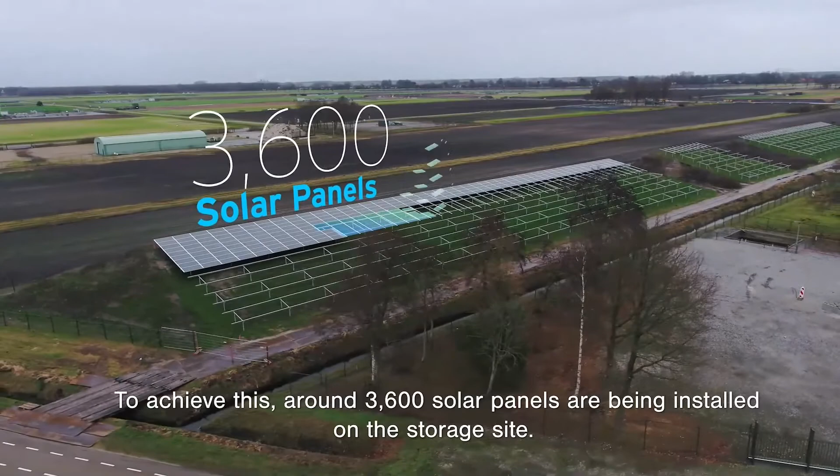Gasunie and its subsidiary Energy Stock have built the first 1 megawatt green hydrogen installation in the Netherlands, near its underground gas storage in the province of Groningen. The unit uses green power to separate water into green hydrogen and oxygen in a process called electrolysis. 1 megawatt hour of green power is converted into 17 kilograms of green hydrogen per hour. To achieve this, around 3,600 solar panels are being installed on the storage site. In addition, the green hydrogen installation is also connected to TenneT's high-voltage electricity grid, through which green power is delivered.

Three containers are installed on site. The first contains equipment to convert the green power to the required voltage for the electrolyzer. The second contains the electrolyzer, in which water is separated into hydrogen and oxygen. The third contains the compressor, which brings the hydrogen to the correct pressure, varying from 200 to 300 bar. The hydrogen is stored in a trailer capable of transporting 800 kilograms of hydrogen to customers in the mobility sector or industry.

In the Netherlands and other countries, filling stations are being developed where cars, buses, and other heavy-duty vehicles can fill up with hydrogen, for example at Green Planet's filling station in Pesse. Filling up takes around 3 minutes, the same as for petrol and diesel cars. A hydrogen car can run for approximately 500 kilometers on a 5-kilogram tank of hydrogen.

Green hydrogen can be used as a renewable resource or fuel by industry. Currently, industry already uses large quantities of hydrogen as a resource. Hydrogen is a sustainable energy carrier that is desperately needed to realize the targets set out by the draft climate agreement. It is CO2-free energy that can bring balance to our future energy management. The aim of the HyStock project is to boost the green hydrogen market and provide the Netherlands with proof that green hydrogen works. It is an important step towards the large-scale use of green hydrogen in the Dutch energy supply.

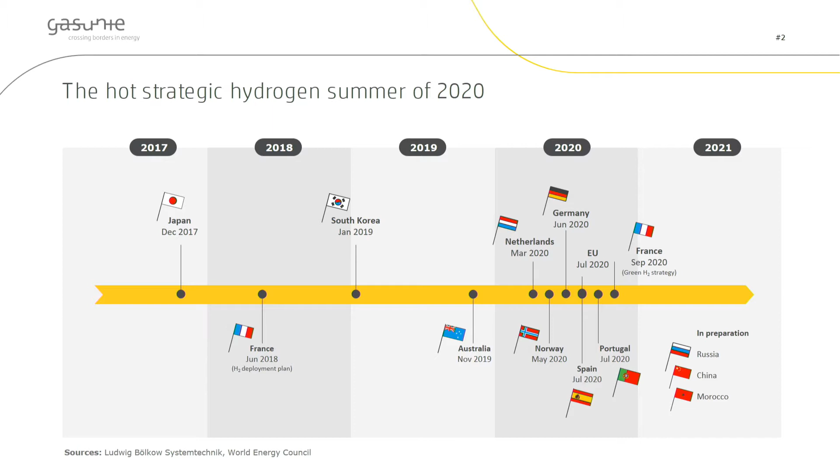To start off with the first timeline, which represents the hot strategic summer in 2020, where all the large countries in Europe launched their hydrogen strategy. Together with launching the strategy, lots of money were put towards building up the hydrogen economy. At the start of the project, back in 2016, you see an empty timeline at that moment. There was not much discussion about hydrogen. It was not seen as the key element. I think at that time electricity was seen as the answer - if we electrify everything, we're done. But that has changed in a couple of years' time, and I think that's also due to the importance of projects like TSO 2020 and what it has delivered.

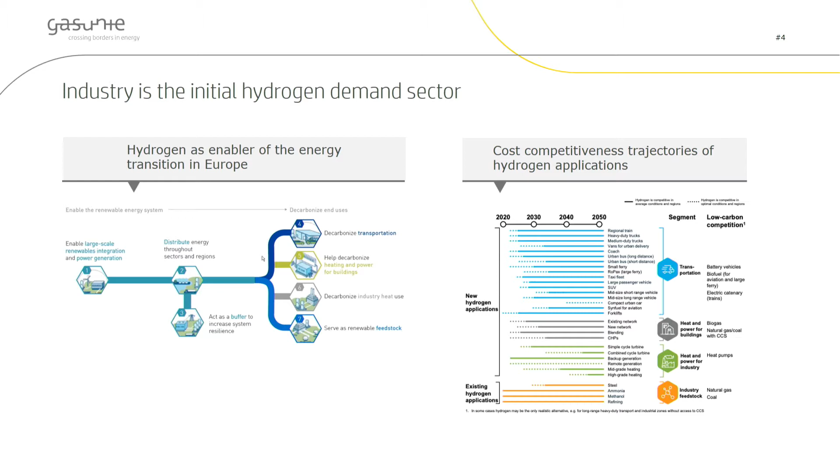If you look at the right side of the picture, the Council showed the different end users, which can be in industry, for heating processes, obviously for feedstock - which is now the common use of hydrogen - but also in mobility, built environment, and electricity production. Because in the future, when we have a lot of renewable energy sources, we need to deal with the intermittent character of that. So we also need power plants, in one way or another, that can provide dispatchable power at the time the wind doesn't blow and the sun doesn't shine.

This picture made by the Hydrogen Council shows that by 2050, all of it can be competitive. That's a key driver in many developments at this moment in time - developing it to the level where the commodities eventually become cost competitive, and where you can make the appropriate choice of energy carrier for the process you have.

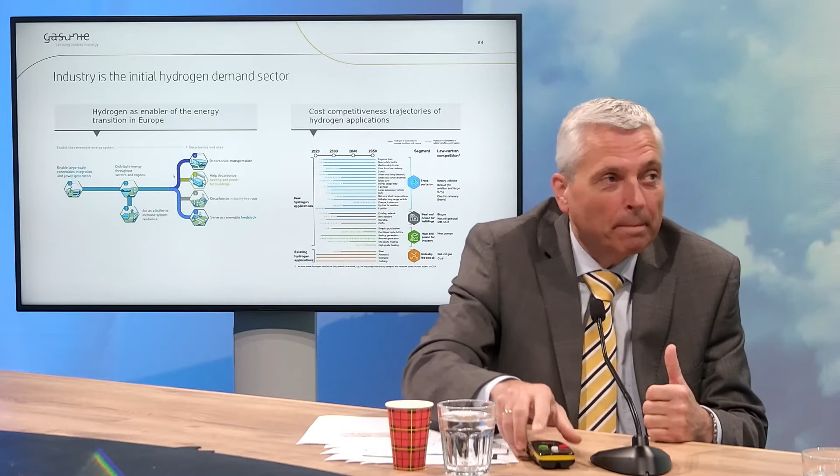And then it's all about connection. If you have your projects - as already shown in the movie you've just seen - you have a location where production takes place, and a location where end use is located, in this case a refueling station, so the actual end use is by the cars driving by. But transport needs to happen in between. If you don't have transport and storage, in this case tube trailers, you cannot make the value chain work. And if transport and storage means are available, that gives opportunities to both production sites and user sites to further develop.

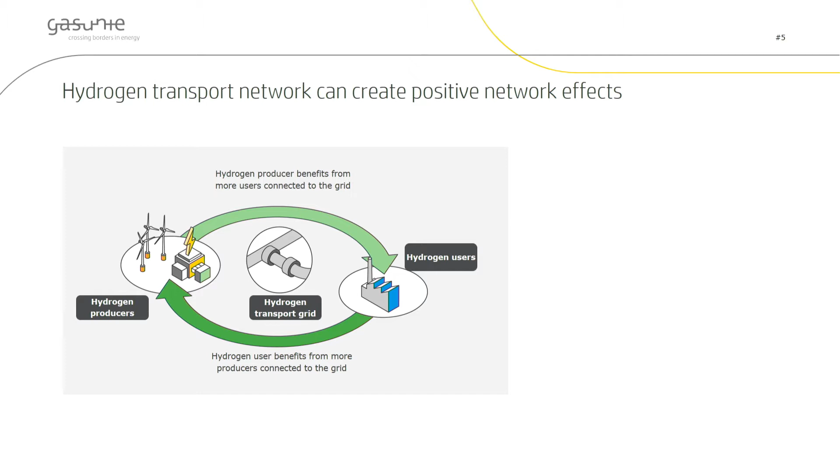So how do we get this whole chain off the ground? Because it's not just a part of the value chain that we need to build up, but the full value chain. We need to make sure we build infrastructure in between - it can of course be pipelines and underground storage, but it can also be surface transport and storage, like for instance tube trailers.

I always call the issue of the energy transition an ostrich and egg story, because I believe it's larger than the chicken and egg story. It's very complex, not only because of the value chain that needs to be built up, but also in the complex situation of the energy transition, where we need to go from use of fossil fuels to use of renewable energy carriers.

What you need to accomplish the energy transition is, first of all, scaling up. All technologies we need basically already exist, only not at the proper scale where we need to use them. So we need pilots, like TSO2020 has shown, demonstration plants and smaller projects that will grow to larger projects to, in the end, not only demonstrate that it can work and build up the market and volumes, but also give opportunity to learn from the experiences.

We also need a lot of renewable energy sources. Discussion on hydrogen for a long time has been predominantly about electrolysis and end use. But we need not to forget that a lot of renewable energy sources are needed, so plans for that need to be made as well.

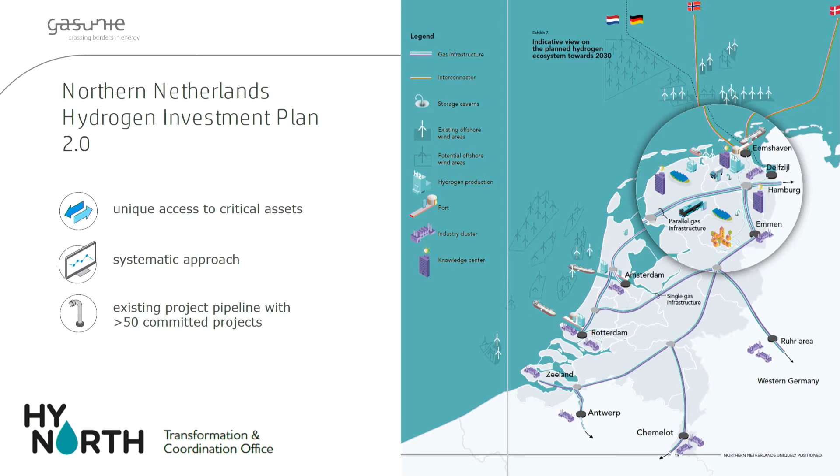And then I come to HyNorth. In the northern part of the Netherlands, 3 provinces - Groningen, Drenthe and Friesland - more than 50 companies have, together with the government and knowledge institutions, put together the Northern Netherlands investment agenda for hydrogen. It's a 9 billion plan, which includes a large project like North H2, aiming at 10 plus gigawatts in 2040, meaning 4 gigawatts by 2030 and 500 megawatts by 2025. But it's also about building up the value chain in the region, combining projects in mobility, industry, heating, feedstock, together with building up the knowledge we already have here. It's the triple helix - government, local government, together with industry and knowledge institutions - to build up a larger hydrogen valley, a larger ecosystem, which can be copied in different parts of Europe and then interconnected to build up the hydrogen economy. We have a very good location for it due to the seaside, wind power projects, and industries. That's what we can do in a systematic approach.

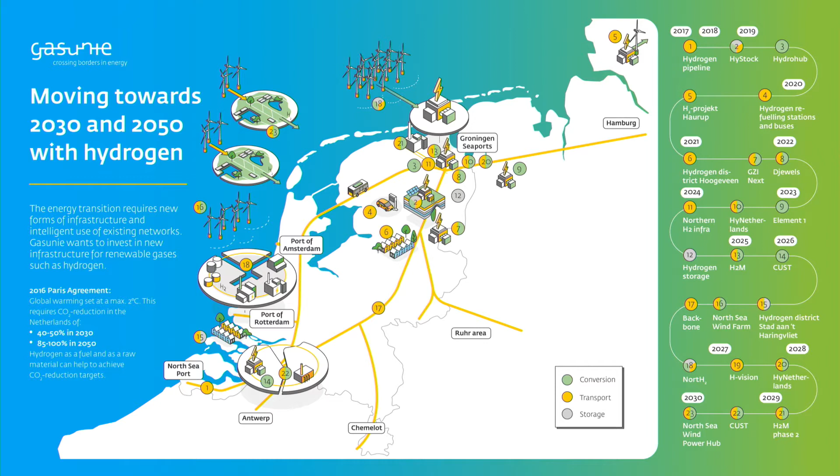And then I will close with the last picture that you already saw shortly in the introduction. This is the project plan that has evolved over the past years for Gasunie, starting with TSO2020 in the northern part of the Netherlands. Lots of projects have been started and initiated in different parts of the Netherlands, including the proposal of the backbone for hydrogen, connecting the 5 industrial clusters in the Netherlands with each other and with international connections. It's a lot of electrolysis. It's still the bridge with blue hydrogen because we need volumes - we need to start off - but in the end all with the aim to reduce CO2 emissions and become net zero by 2050.

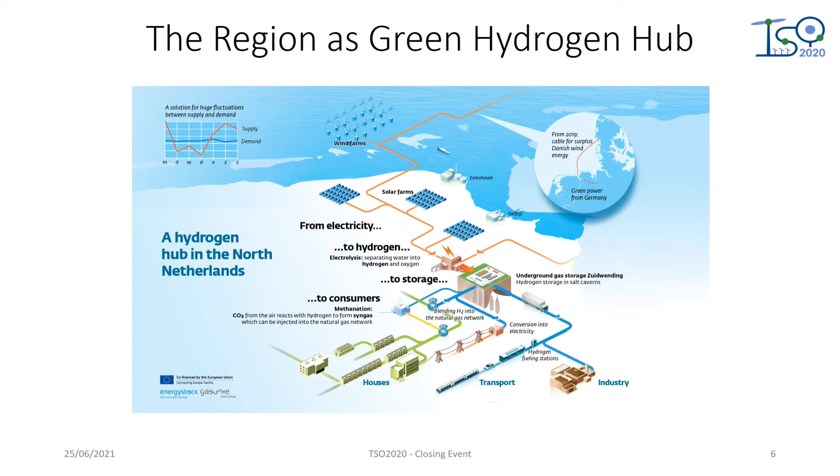As that begins to take momentum, the region is very well fit to become a green hydrogen hub, which is one of the elements that triggered the start of TSO. This picture is very illustrative, because it depicts wind on the sea, brought ashore, other forms of renewable generation from solar or onshore wind, being reconverted, stored, and then evacuated in every aspect of energy - in mobility, in industry, and in the built environment.

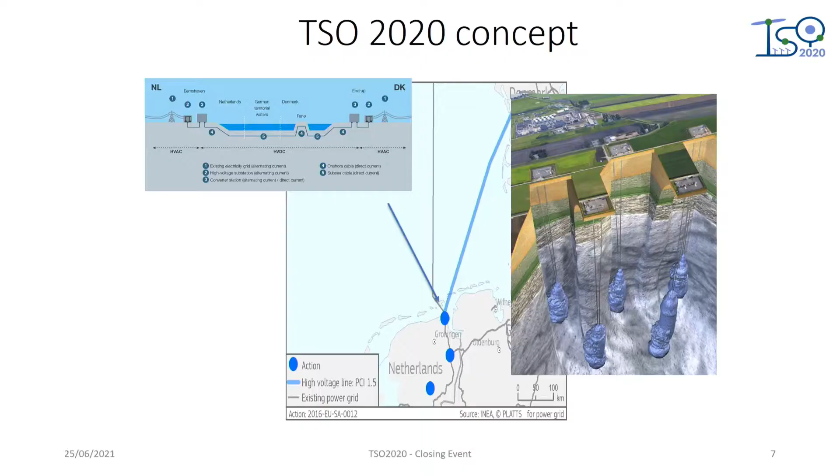Now let's go to how TSO looks and what it addresses. This is one of the pictures from the call recognition. The blue line is the CoBra cable, which lands in the Eemshaven. Then there are underground salt caverns to be developed in Veendam, another framing on which this 1.1 megawatt electrolyzer has been established. And hydrogen has something orange, something royal - it has been jump started and opened by our Majesty the King.

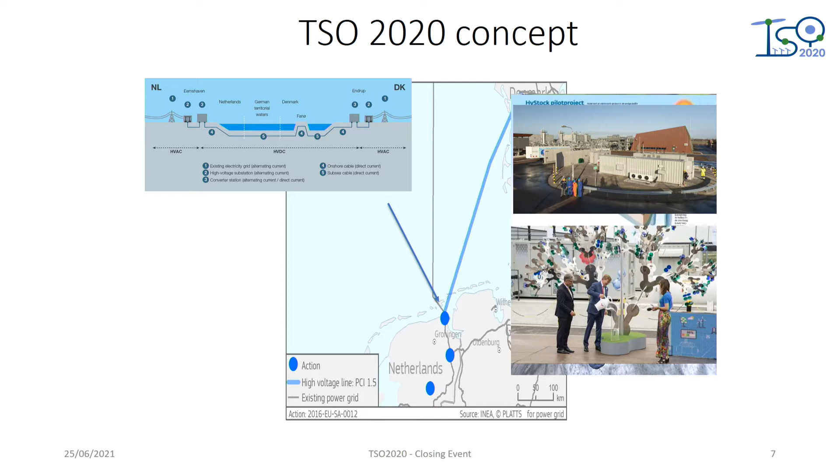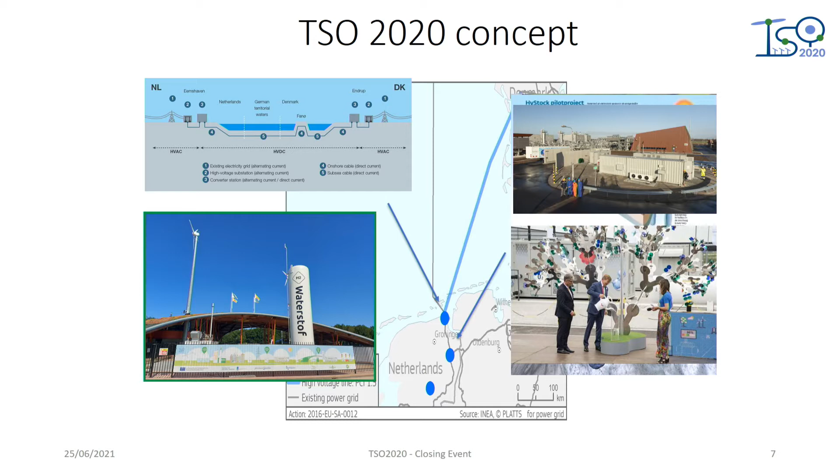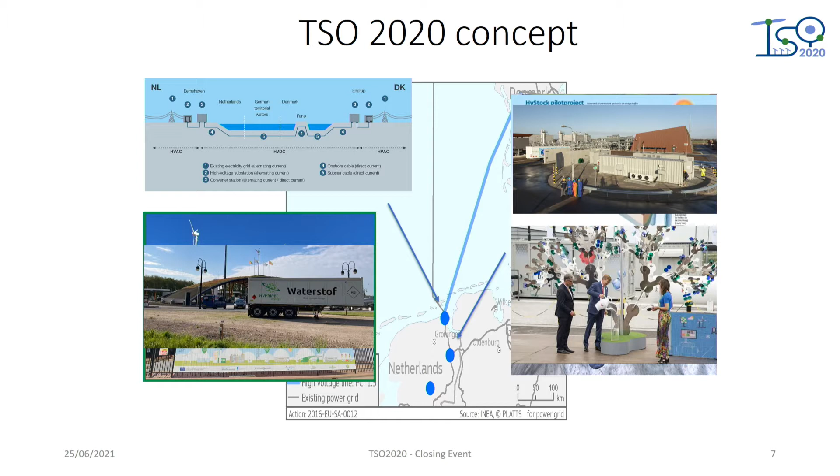And there are trailers as well, which travel around the hydrogen. As we all know, hydrogen doesn't travel very well, so you need to be very cautious. You have to know what you're doing, and that is something we managed in the process and in the project. Of course, this project cannot be executed without help from governments - Europe by name of INEA, but also our Ministry of Infrastructure and Water Management. So a lot of parties are involved.

About 20 projects, which was, you can believe me, a big task. And it cannot be done without support from the private parties who do all the investments, and the support from the European Union, especially the Fuel Cells and Hydrogen Joint Undertaking, without whom this could not have been possible. We need this - keep up the good work, guys. It's really very important.

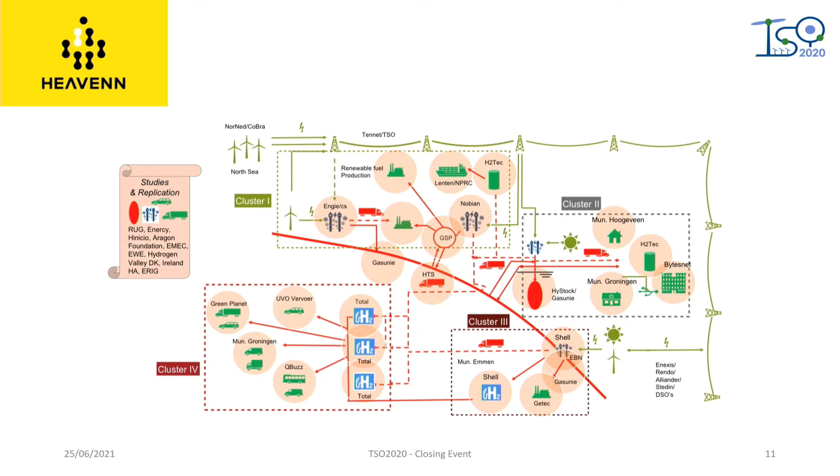This is a frightening picture of the project - we'll step over that, but it indicates complexity. If you look through it more in detail, you can see 4 clusters, and in the brackets, the projects do their operation, manifesting in a fully functioning, integrated green hydrogen chain.

Demonstrating that this works. So we have a nice sequence from TSO, which was the foundation with all the parties - we'll come to that later. That resulted in the idea of an investment plan, which resulted in the Hydrogen Valley application and project. Again, we cannot do this alone - we need help from Europe, and as mentioned, we'll come to that later with the package which will be announced shortly.

This picture is also known. The yellow lines are the hydrogen backbone, and the backbone needs to be fed with hydrogen, so we need to increase the production of hydrogen. As Renee said, that is going on - that's a task in which we must keep our eye on the ball. We need offshore wind power, we need fitting regulations. Everything over this whole value chain needs to be aligned to make this ambition real, because we need the green hydrogen to match our climate ambitions. So the policy needs to be fit for purpose.

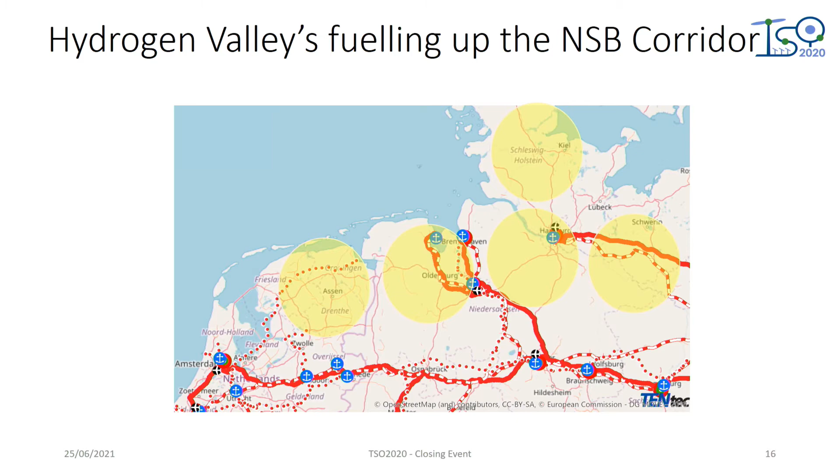So this generates a lot of momentum, and I think Els and Mariette from the Ministry of Infrastructure and Water Management will touch upon the Hy3 and the RH2INE project, which are exemplary in this respect. And just a very short wrap-up on TSO.

It demonstrates that the combination of harvesting electrons and canning the energy in the form of hydrogen works, makes it tangible. I think the synergy concept works. Edward will also get to that, and the colleagues who are going more into depth with that. It accelerates the uptake of hydrogen as a fuel for mobility, and it can be replicated.

It can be replicated in various sizes, from a small to an extra large one, because that's what we need to do. It promotes, and I think it should stimulate, the further development of the PCI concept.

The Cobra Cable is a PCI project, and makes the TEN-E policy also fit for purpose to transfer the energy to the markets. It also promotes the TEN-T domain, because Synergy, our TSO project, is a combination of TEN-E and TEN-T, which was also for the CINEA, formerly known as INEA, an experiment, and also for the directorates Move and Energy, to see how this works.

As stated, it contributes to the development of investment agendas, not only in our region, but hopefully also in others. That is work being done amongst others in the S3 platform.

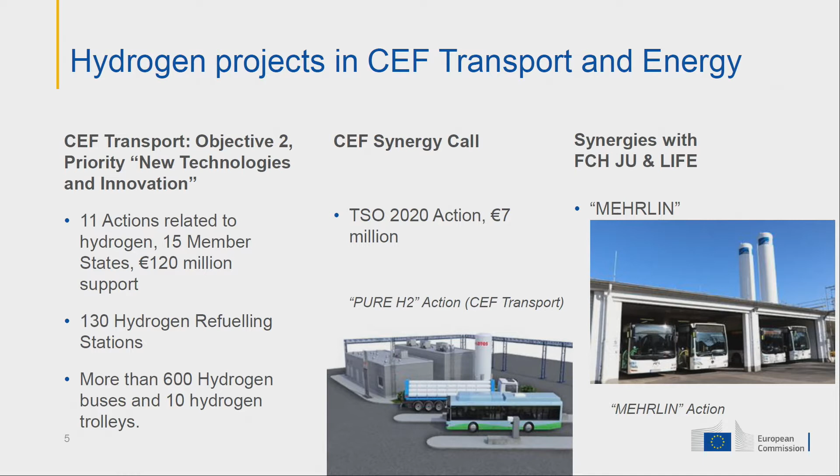If we look now at the future and what the new funding perspectives are offering for energy, transport, and also hydrogen projects in terms of sector integration. I will present the new CEF program. We have a budget of 33 billion euro in transport, energy, and digital. In transport, we'll have around 25 billion euro, in energy 5.84 billion, and in digital 2 billion.

I think the objectives relate, like in the past, to develop and modernize the trans-European networks. But there is new emphasis. And one of them is the facilitation of cross-border cooperation in the field of renewable energy and promotion of sustainable mobility. And then also the emphasis on synergies among sectors.

There is more emphasis on it in the new legal base, which will make it possible for the Commission and for CINEA to exploit the concept of synergies more broadly than what has been done in the past. And this, again, in the new policy context, for example, in the context of energy, the revision of the TEN-E regulation will impact the CEF energy program, as hydrogen will allow also the funding of hydrogen projects.

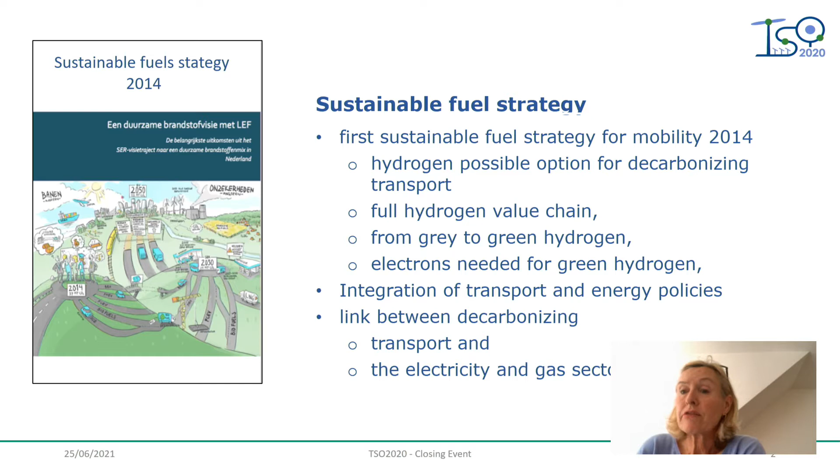When this project started in 2017, our world looked very different from now. In the Netherlands, hydrogen was recognized as one of the possible options for decarbonizing transport already by 2014, and we made a sustainable fuel strategy for mobility. At that time, we started realizing that to work towards decarbonization of our transport system, we would need to address the full hydrogen value chain, starting with a shift from grey to green hydrogen, and thus needing green electrons for green hydrogen. This is where we felt the need for more integration of transport and energy policies, and saw an opportunity to create a stronger link between the decarbonization of the transport sector and the electricity and gas sectors.

So the Synergy call, this window of opportunity was spurred by the European Commission initiative in CEF, to create this new initiative allowing interested stakeholders from transport and energy domains to come together. And it's through this initiative that a concrete opportunity occurred to have first living labs in the Netherlands and Austria, exploring these new interdependencies between electrons, molecules, and mobility. The Synergy call has proved to be a unique instrument that has sparked cross-sectoral collaboration needed to fulfill our pledges for the Paris Climate Agreement and the upcoming Fit for 55 package.

So the northern regions of the Netherlands managed to get all the relevant actors together, and they found it eligible with their project proposal for the TSO 2020, which was funded by the Synergy program and co-funded by the Dutch government. And it's with great pleasure that I attend this formal closing event of the project, which has shown us that we need to work across sectors, realizing new value chains together on our connected transition pathways for mobility and energy.

The next slide, please.

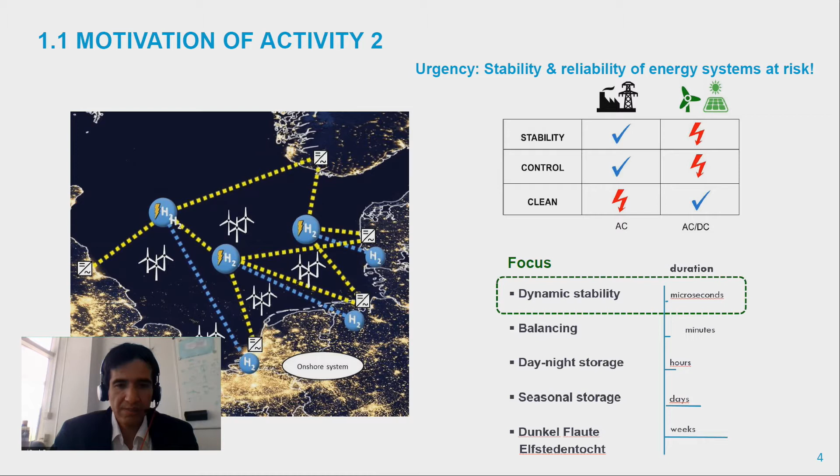So this is an illustration of what we wanted to investigate. We keep a more or less conventional system, with electrolyzers being mainly consumers, not having any special control system.

If we have, for instance, the sudden loss of a gigawatt offshore wind farm, we'll have a response like the black line there—the frequency going down to very low, unacceptable values. The lowest point is called the nadir, measured in hertz. Ideally every device in the system operates at 50 hertz, the standard value. But if there is this contingency and the electrolyzers are doing nothing, we'll get the time response shown, in a very optimistic case.

We will be able to recover from this very low or high frequency variation, but very slowly, and it will take a lot of effort and resources, which will also affect other time scales like minutes and hours. From an economic point of view, we'll have to redispatch and reaccommodate, and this will happen very often, leading to a tremendous increase in cost for reaccommodating the system to cope with imbalances that could have been better mitigated in milliseconds.

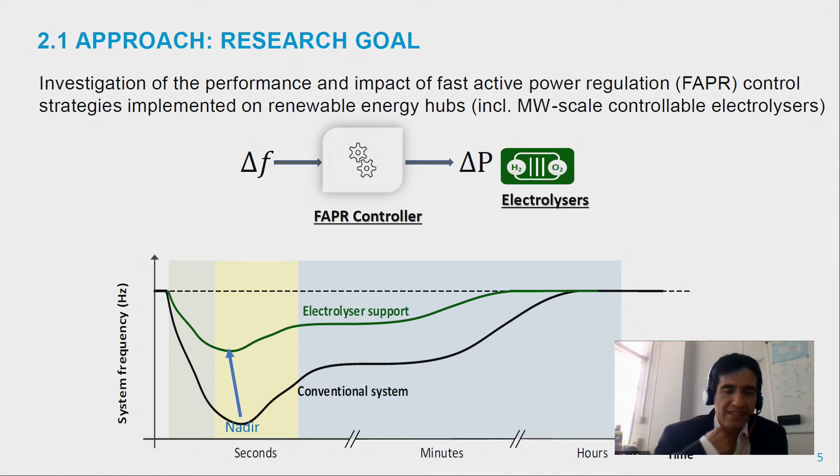So then we took as a case study a futuristic situation in the north of the Netherlands. On the map we highlighted different components taken into account in our software-based model: a substation in Eemshaven, and important controllable components like the NorNed high voltage direct current link, the COBRAcable interconnector, and other transmission lines, like the 380 kilovolt line highlighted in red, plus other voltage levels at 220 and 110 kilovolts—modeling more or less the northern Netherlands in detail on a supercomputer.

We also added a theoretical 300 megawatt electrolyzer installation close to the Eemshaven station. An important point of research was: what if we use the electrolyzer's millisecond-scale response to do control actions instead of, for instance, altering transactions through NorNed or the COBRAcable to do the same task, since that has cost implications? Also, if we distort the operation of these interconnectors, they might not be as effective—whereas electrolyzers could even be more effective than these changes.

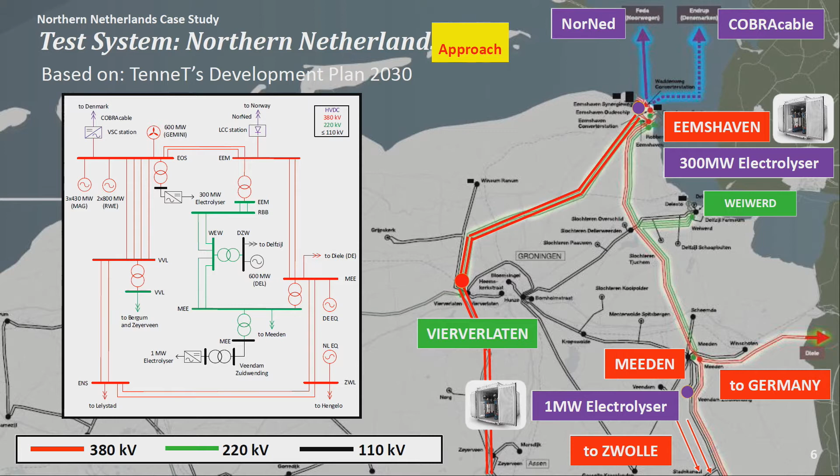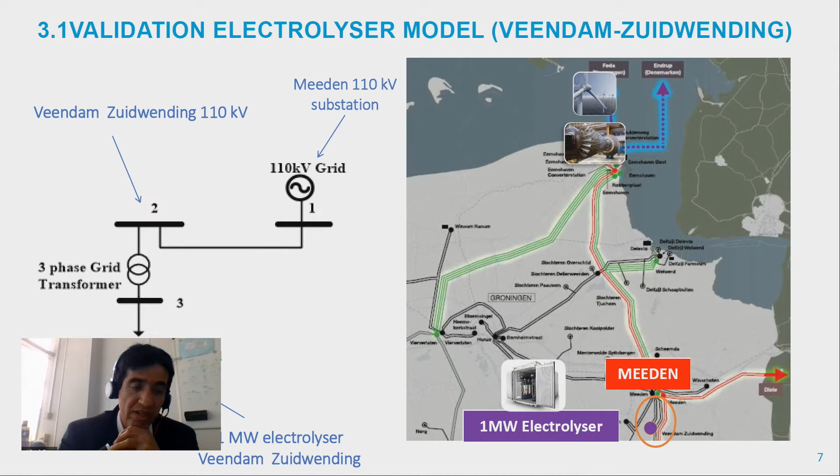An important question here is how we model the electrolyzer, because there was no generic model that could be used in future studies. So we needed to develop from scratch a model for this project, which will also serve as the base for future programs concerning improvements in electrolyzer technology to support electrical systems. There have been some models before this project applicable to electrolyzers, but mainly for long-term time scales like minutes to hours - useful for checking variation in consumption and doing techno-economic assessment, but not looking at the fast physics in milliseconds. Also, they weren't developed for megawatt or gigawatt scale.

So we developed a model theoretically in our supercomputer, and we needed to validate it against a real model, at least to benchmark it. Benchmarking is a very important step when developing new models that are going to become generic in the scientific world.

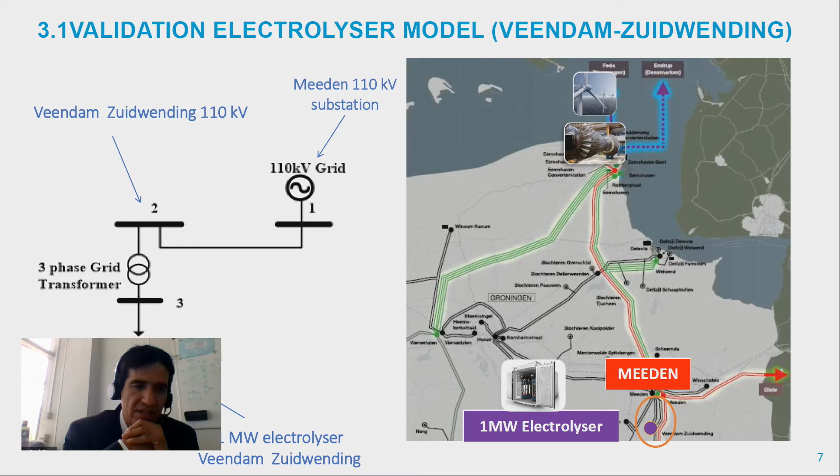So we created a model, and taking advantage of this project, we have a pilot in Veendam-Zuidwending. We cooperated with project partners like Gasunie, and also got support from Kirion to install meters and perform a measurement campaign to get the necessary variables to calibrate and see if our theoretical, detailed model could follow a real device - which will have time characteristics inherent to the technology, but with similar performance. We have here a schematic of the interconnection of this electrolyzer, from an electrical point of view, to a substation in Meeden. Can we go to the next slide, please?

This is an illustration of the measurement campaign. The measurements are shown with dotted lines, and the simulated results with continuous lines. Over a week we ran different tests, challenging the electrolyzer to increase or decrease consumption - from smaller steps like 90% to 100%, to larger steps like 50% to 100%, or even a more challenging 0 to 100% - to see how fast it would ramp up or down in consumption, ideally within a few milliseconds, which is what we're aiming for in this investigation.

As we can see in these figures, we were able to produce a model that replicates one type of technology, and the model is flexible enough to simulate the behavior of other technologies as well. This is good for benchmarking purposes, and even more important for researchers, because with our generic model we can try all types of new concepts that will motivate new specifications for future technologies.

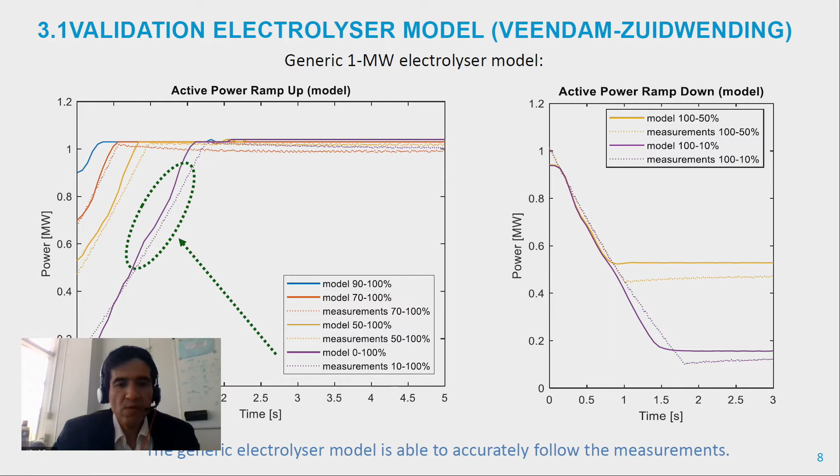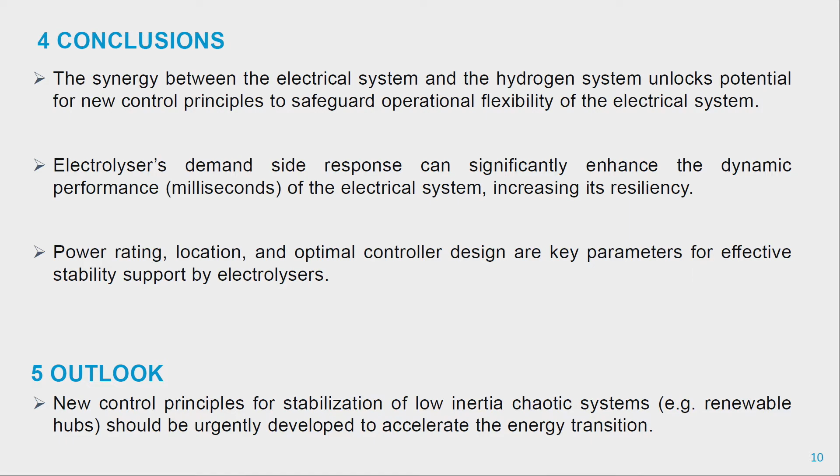Really, really interesting. So if I understand correctly, the conclusion from this project was that electrolyzers can take over the frequency control function that conventional plants like gas plants carry out today - is that right? Yes, we illustrate with these cases that this is a feasible option.

And the areas to explore in future, you said it's a location-dependent effect, so we need to think about where the electrolyzers should be put, and it's a question of looking also at the size, if they're bigger. And as we phase out more conventional plants, how is that effect maintained or enhanced, or can we maintain and enhance it? Is that right? Yes, exactly.

And especially the new kind of control methods we need to attach to the electrical system - this is very important. What would be an example of a new kind of control principle or method? Just one example, when you say that?

Yeah, in this project we did one which is like a virtual synchronous machine. It's kind of emulating the fact that in a classical system we have rotating mass, but we don't have that here. We just did a trick with some sophisticated control system to make the electrolyzer behave like a synchronous machine, like conventional plants use, with the difference that this is much faster - because a conventional machine, with its mechanical part, will take several hundred milliseconds to seconds to react properly.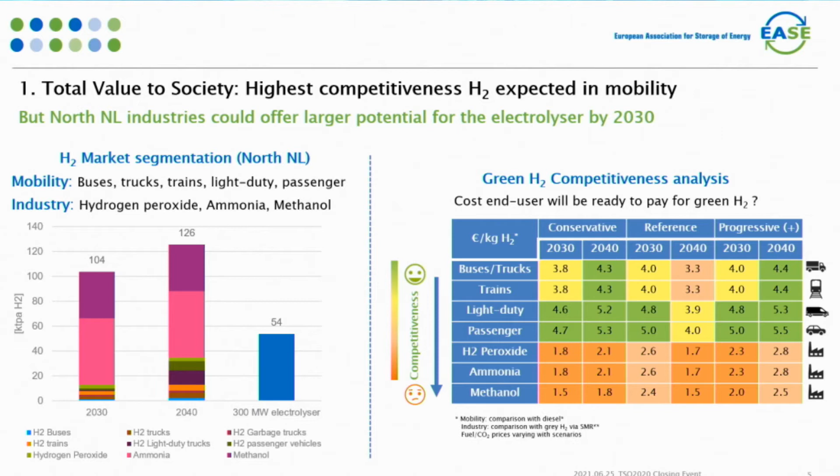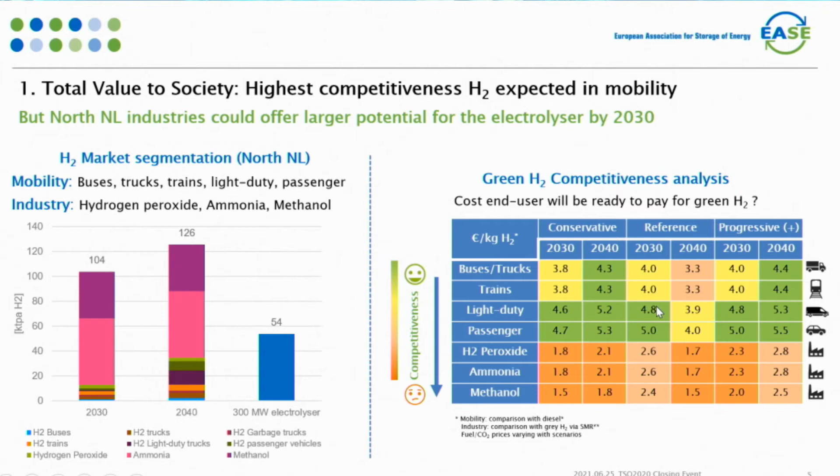The table gives the cost in euros per kilogram of hydrogen that end users are expected to be willing to pay in 2030 and 2040. The colors show the competitiveness of the produced hydrogen in the same years. We see that mobility in general scores quite well, most values are green, while competitiveness in the industry in general seems quite poor.

An investigation of the 11 KPIs mentioned earlier was made with the market model and the grid model for the electrolyzer and the 300 megawatt battery. Both technologies score differently on the different topics, as can be seen in the spider diagram.

The main conclusions of the comparison are that we see CO2 emission reduction and air quality improvement by 2040 for power to gas, mainly due to decarbonization of the transport sector.

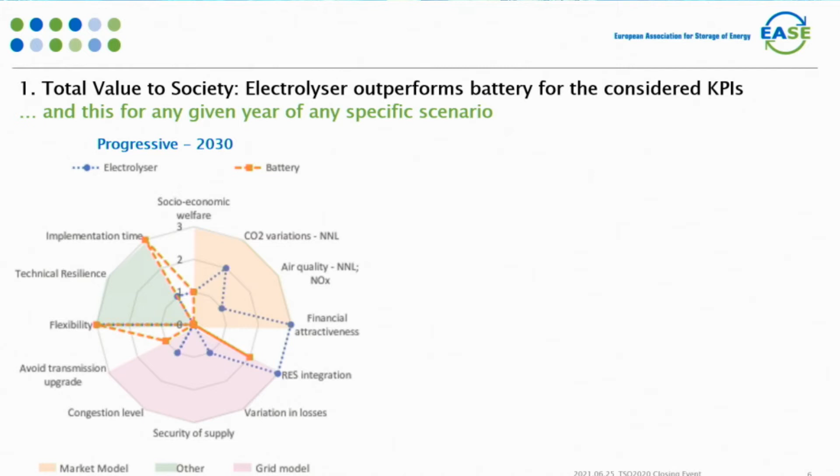There is economic viability for power to gas, but not for the battery, meaning there's a favorable payback time for the power to gas installation. The electrolyzer scores better on renewable energy curtailment reduction, and grid losses are lower.

The availability of the power to gas installation is higher than the battery, and both power to gas and battery can participate in the frequency containment reserve and frequency restoration reserve, so they both contribute to flexibility. An advantage of the battery is that it can be implemented faster than the electrolyzer.

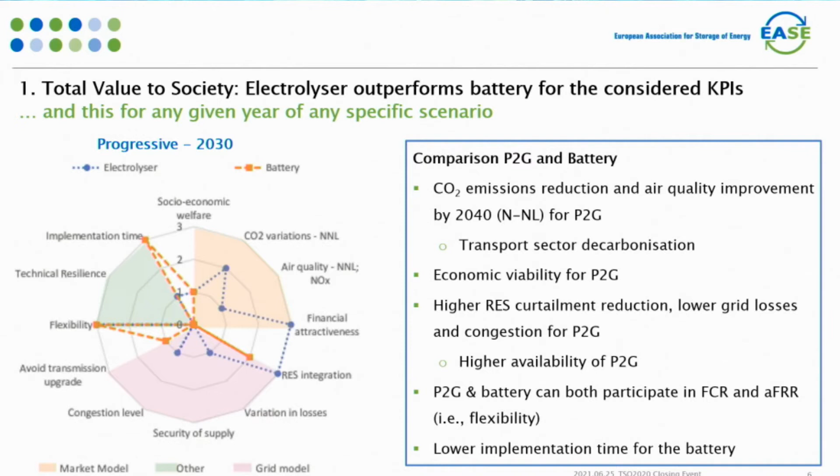The societal CBA shows that the mobility segments seem more promising than the industrial segments. There is a higher willingness to pay.

It shows further that electrolyzer operation strategy should be optimized throughout the project time horizon, since market circumstances will change over time. There's a need for large-scale hydrogen storage and cross-sectoral integration.

In this context, the electricity and mobility markets bring key benefits. The revenues increase as the economic viability, and decarbonization of the transport sector is possible at no extra cost for society. Besides CO2, SOx, NOx, and particle emissions are also reduced.

There are benefits for the local economy already of the demonstration case, like modernization of the well-established gas industry. Power to gas gives a reduction of renewable energy curtailment, electrical losses, and congestion level.

Finally, progressive scenarios with high shares of renewable energy lead to higher benefits of the electrolyzer, on one hand due to more hours with low electricity prices, and on the other hand due to a higher value of the hydrogen.

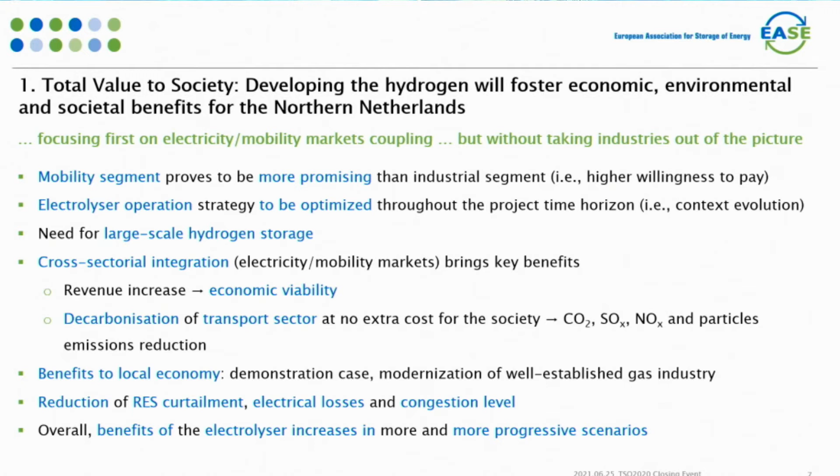Task 2 of Work Package 3 concerns the grid modeling. With the model, 5 KPIs have been investigated, and the results were used as input for the CBA of Task 1 and the business case evaluation of Task 3.

All KPIs, except for security of supply, have been quantified. The results are shown on the next slide, first for the electrolyzer and then for the battery.

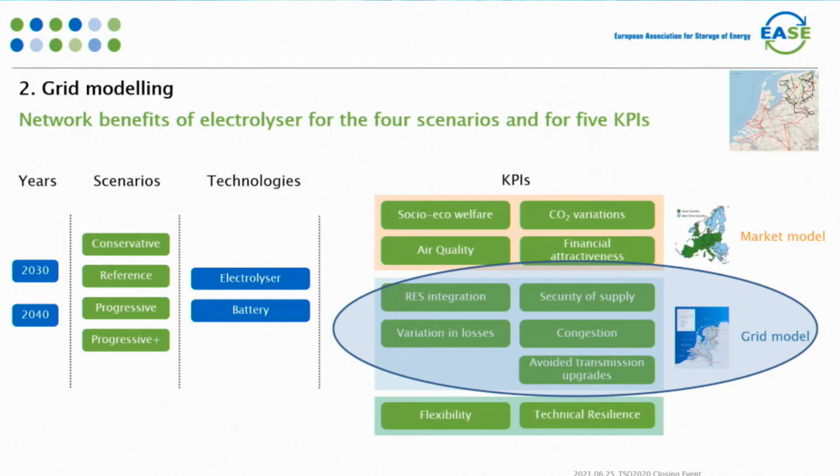We see here the results for the electrolyzer for curtailment, variation of losses, congestion reduction, and avoided transmission upgrade, and also for the battery. For time's sake, I will not go into the details of the results and only mention the main conclusions, depicted on the next slide.

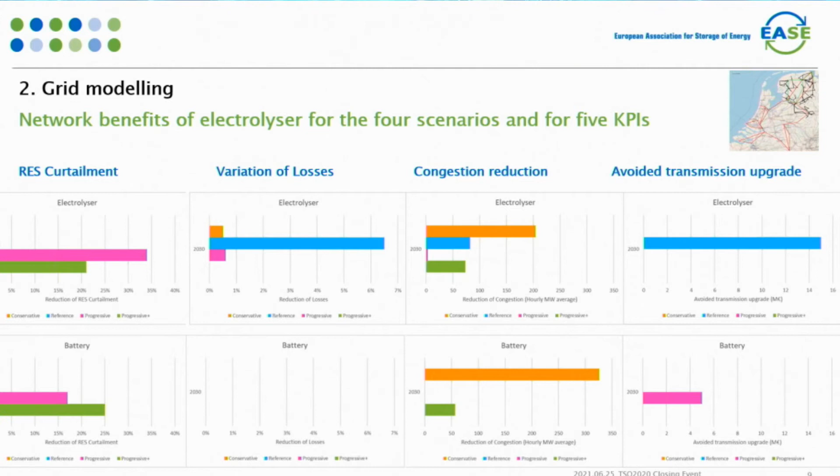In all scenarios, security of supply is met, both for the electrolyzer and battery case. The electrolyzer contributes to a stronger reduction of RES curtailment than the battery. The benefits of the electrolyzer and battery are greater in more progressive scenarios with higher RES penetration.

Using the electrolyzer leads to a reduction of losses in the electricity network, and it performs here quite much better than the battery.

The electrolyzer reduces congestion more than the battery, except in the conservative scenario. For all scenarios, the avoided cost of the transmission grid reinforcements are lower than the cost of the electrolyzer or the battery.

The third and last task of Work Package 3 concerns the business case. A model was developed to calculate and optimize the business case of the electrolyzer. The objective was to find the maximum revenue across different electricity markets, namely the day-ahead market, the intraday market, and the market for automatic frequency restoration reserve.

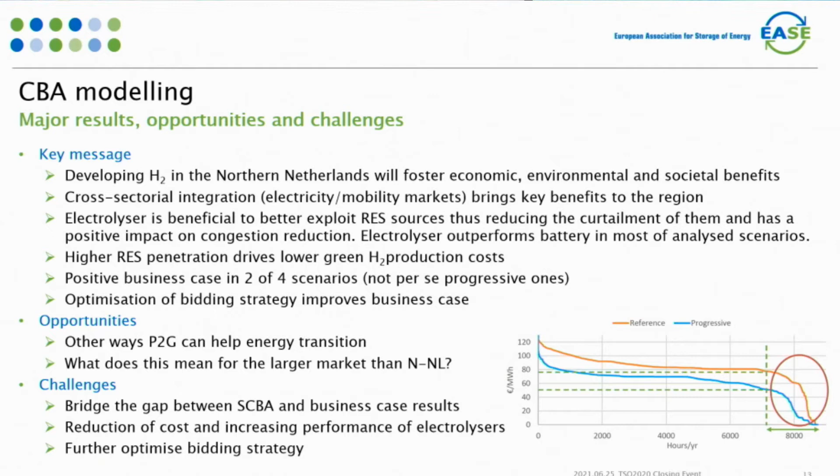So basically, the conclusion is the electrolyzer outperformed an equivalent 300 megawatt battery when it created less congestion, was more economically viable, less renewables curtailment. My question is that presumably depends on when you operate that electrolyzer and where it's located. Also thinking back to what Jose said, location is important. So can you clarify that and link to that? This compared it to one big battery, but what if you had a fleet of smaller distributed batteries? Would you necessarily get to the same result?

No, I don't think so. We would get probably the same results. We see that the contribution of the network congestion is not too large in the CBA and also not in the business case analysis. We see more income from the hydrogen market and from the trading on the different electricity markets. So I think the main issue is that we need the longer term advantages of hydrogen and power to gas more than the short term advantages of the batteries.

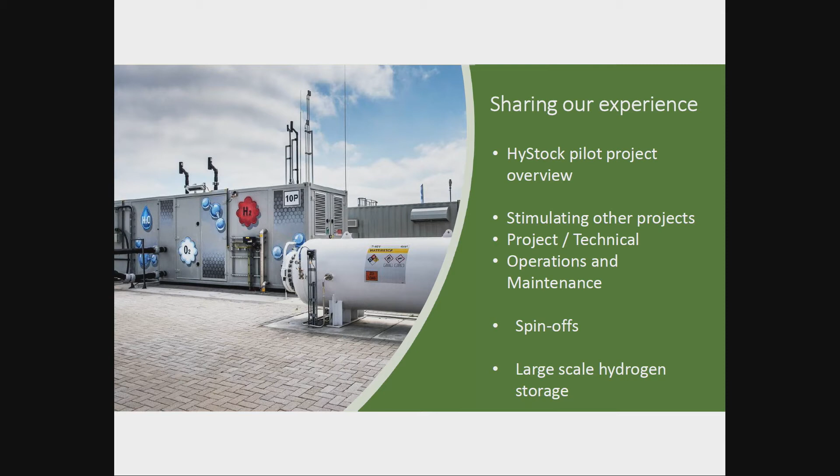So what I will share with you today is first of all a little overview of the pilot itself, for those who are not familiar with it. After that, I will continue with sharing our gained knowledge from different perspectives: a commercial perspective, a project technical perspective, and also what we learned from the perspective of operations and maintenance. Finally, I would like to show a few spin-offs we have been able to achieve from the project, and how we are using the knowledge gained for the large-scale projects that Gasunie is now working on, which Renee already informed us about.

So the overview of the HyStock pilot: a 1.1 megawatt electrolyzer pilot connected to solar panels, but also to the national electricity grid. After the electrolyzer, we have the compressor, which can compress the hydrogen to 200 or 300 bars, and we store it in tube trailers. By means of the tube trailers, the hydrogen is then transported to the end users.

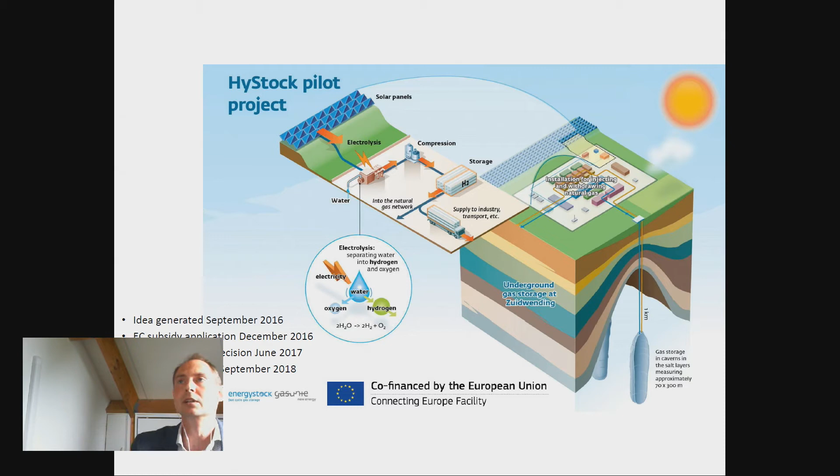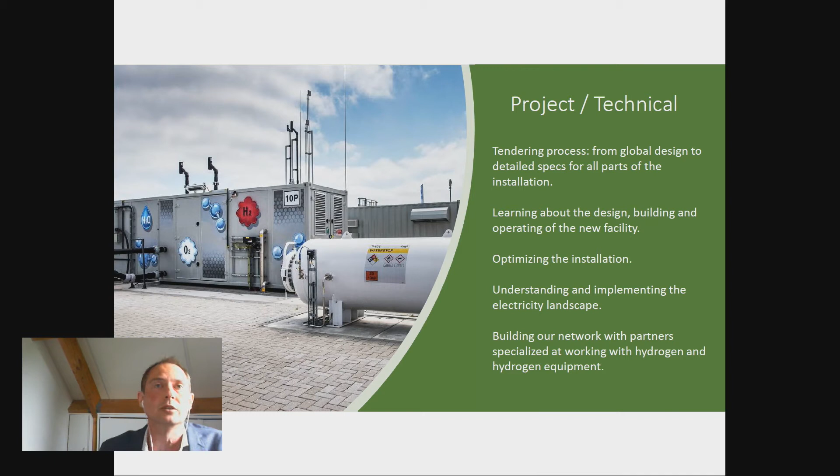And of course it helps us build our network with partners specialized at working with hydrogen, and also partners who are supplying hydrogen equipment as well. So that's very useful, of course, for the Gasunie organization as well.

Some other insights that we have gained through the pilot project. We learned about the quality aspects of hydrogen. Of course, it's from the electrolyzers perspective, so we are somewhere in the 5.0 standards. We learned about the efficiency of the whole installation, the conversion installation.

From asset management and reliability, there are certainly learning points for our organization, as well as from maintenance and spare parts. You see quite a shift there from our supplier of the installation now towards our technical people working at the assets, who are more and more taking over that role. They are learning from it, and they can also take over that maintenance role. And more spare parts are also at the location.

And something new for us also was the whole tube trailer distribution model, with more parties coming with trailers to our location. We also have to take that in mind with when do we start the conversion services and when do we swap the trailers. So you can see we learned quite a lot from different perspectives for working with hydrogen, and also gained insights into the difference between natural gas and hydrogen as well.

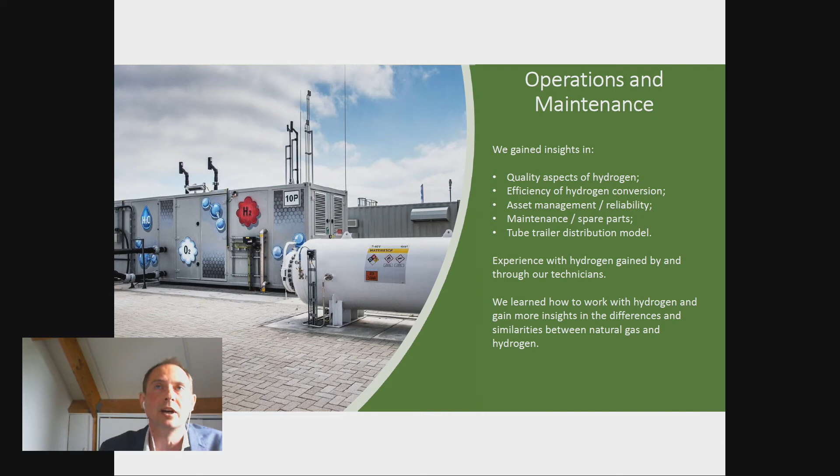Very recent pictures here of one of the wellheads of one of our caverns. You can see the Christmas tree here, and this summer we will do the testing of the Christmas tree and the whole tubing downwards to one of the options we have, where we can in the future build hydrogen caverns. So it's up to more than 1,300 meters deep, and we will test all the materials for hydrogen.

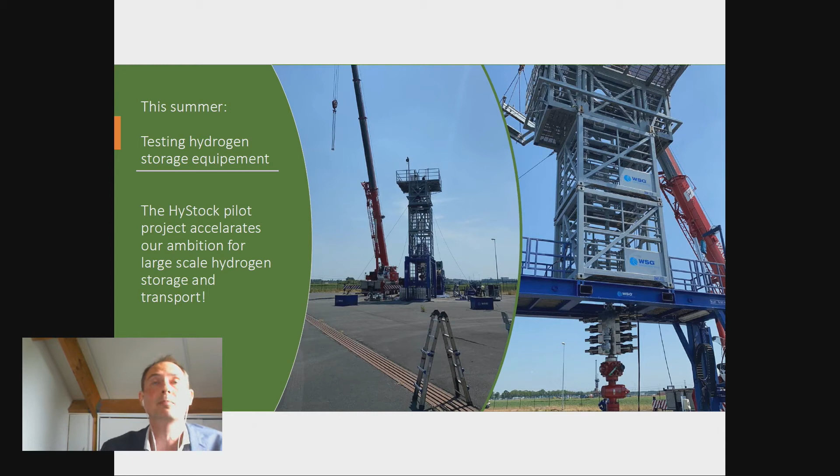So I hope to give you a little bit of insight of what we have done, the experience that we have gained. For us, it's very important that the people within the organization gain knowledge of working with hydrogen. And it's very good to see that we can use that knowledge now in the large-scale projects that Renee showed earlier today. So that's a really good and nice spin-off we see from the pilot project.

Thank you very much, Robert, and also for looking ahead to this summer and the actual work going on now, testing the potential storage equipment for the next stage of the project. Just one follow-up question: you mentioned that this project has also enabled you to gain insights into the differences and similarities between natural gas and hydrogen. Could you give us one example of what you've learned on that front? That's useful, I guess, going forward.

Yeah, I think it's a lot of technical aspects. Of course, hydrogen is a different material than natural gas, so from a safety perspective, it takes a different view of how we handle it. But also, for instance, for salt caverns themselves, you have a different temperature effect when you store it in salt caverns, opposite to natural gas - the Joule-Thomson effect. So all that kind of insight is of course very, very useful when you go into the next steps for large scale storage.

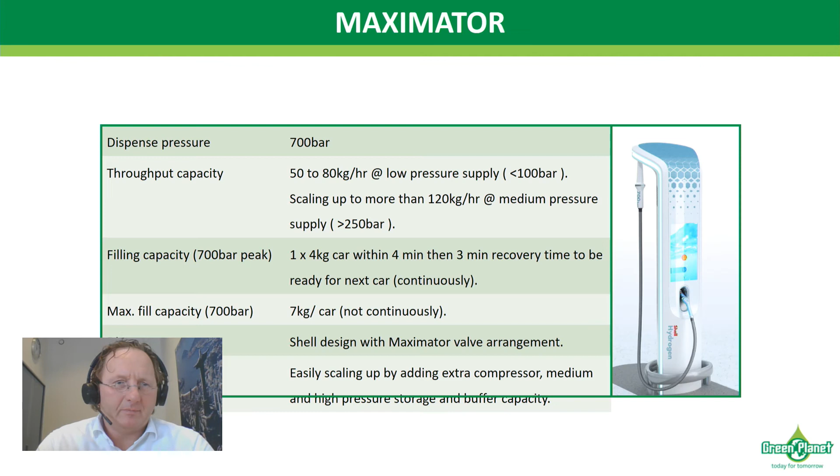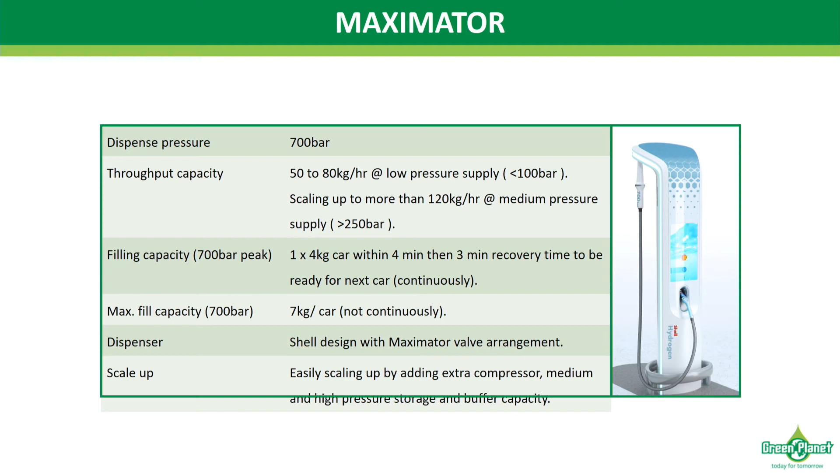Yeah, we have chosen the Maximator hydrogen refueling installation, and it's an installation that is ready for the market of California, and it's a big machine, and it can give a lot of hydrogen in a very short time, and it's combined with the Shell power dispenser, and that's important because it has to go smoothly refilling your hydrogen, especially for cars.

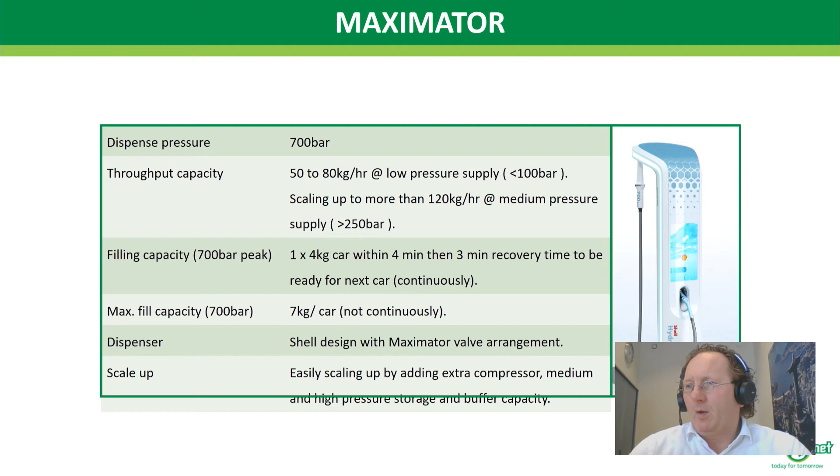And yeah, we had a lot of work to do for getting and finding all the information about the hydrogen refueling station, but also with permits that need a lot of time, and we got a nitrogen crisis, so it was a lot of work to get these permits, but we learned a lot - Green Planet, but also I think the local government, the regional government with these permits that have to be given. Let's go to the next slides.

Yeah, and there it's in real. How beautiful is that? Here you see the Shell power dispenser, and yeah, it's working good, and it's very consumer friendly, making people very happy to refuel their hydrogen car.

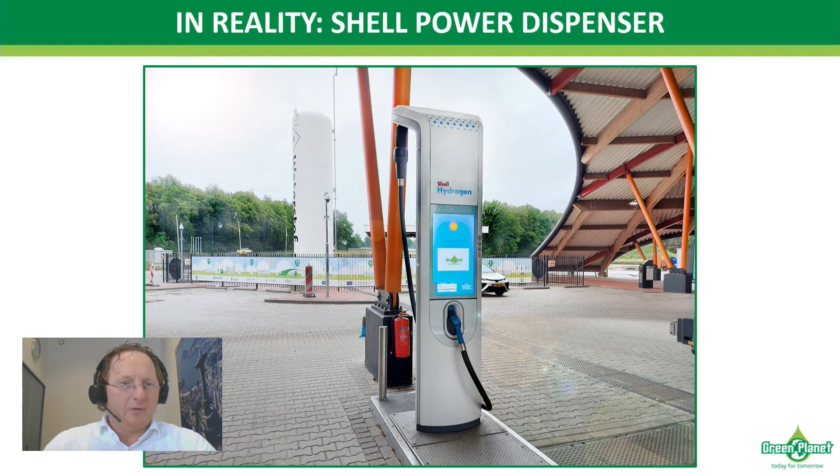And behind you also see the storage of hydrogen at Green Planet, and there are also the machines. Let's go to the next slide. We can see it even better.

Now, we put on hydrogen very big there on the storage, so everybody knows hydrogen is available at Green Planet. And if you look a little bit more below, you see the hydrogen storage - the story of Green Planet.

With all the parties we are working together. If you go to the next slide, please.

Here we put all the doors open, and you can see all the machinery from Maximator, who is making the pressure from our storage at 80 bar to 900 bar to refill the cars with 700 bar. Normally the doors are closed, and you cannot come so close for safety reasons, but it's online now. We can open the doors and show you the beautiful technical operation from the hydrogen refueling station.

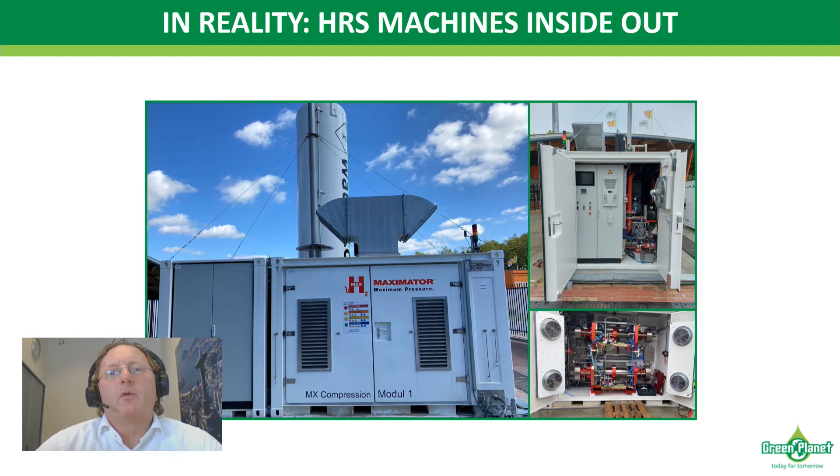Next slide, please. Yeah, the hydrogen hub Delfzijl. Let's go to the next slide. That was the second task. And here you see, and you also heard Robert about it.

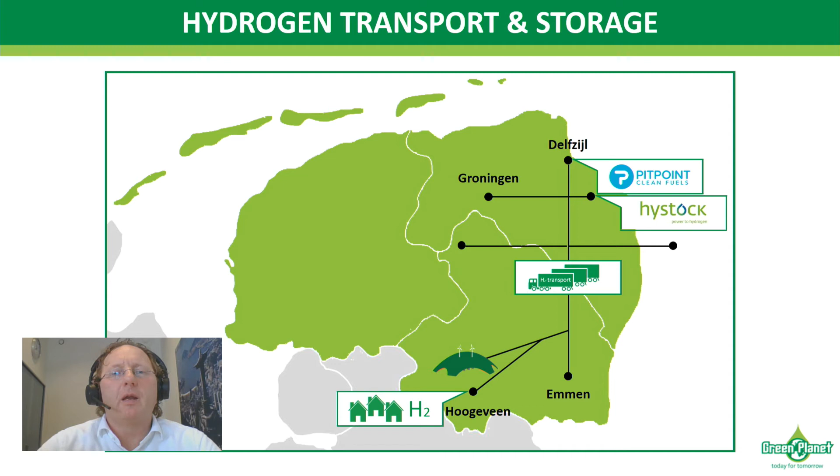We can load the hydrogen trailers at Hystock and also by Pitpoint in Delfzijl. We have 3 trailers now who can bring the hydrogen everywhere, also at Hoogeveen, with the hydrogen village there, and of course to Green Planet. Next slide, please.

In the trailers, it's a pressure of 300 bar, 500 kilogram, and when they unload it at Green Planet, they deliver 320 kilogram of hydrogen. Next slide, please.

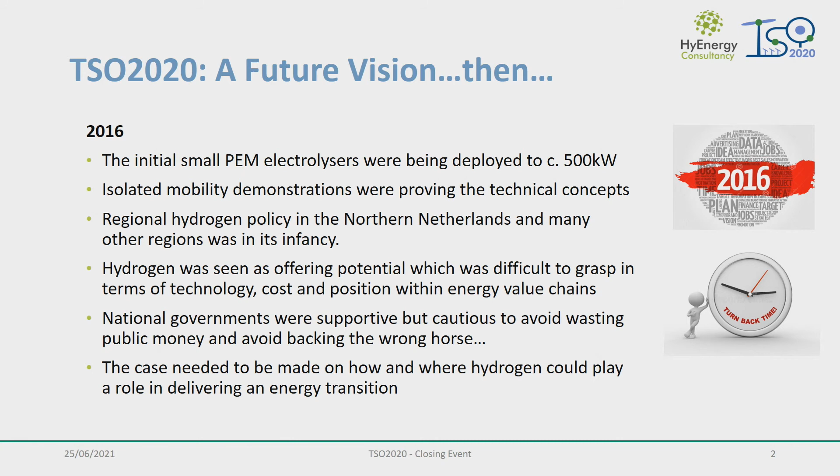So if you can go to the next slide. I want to recap on some of the stuff mentioned earlier by Renee very early on. If we take our minds back to 2016, we are in a completely different world. We have electrolysis looking at hundreds of kilowatts rather than even megawatts. We have mobility demonstrations that are very isolated, trying to prove technical concepts. We have a lack of planning and a lack of hydrogen awareness within both national and regional governments. And hydrogen, in terms of political understanding, is quite difficult to grasp.

Nobody really felt like they understood exactly where hydrogen could fit within the energy value chain. And really, that's where TSO was born—envisaged to help people understand how hydrogen could play a role within the energy value chain, both from an upstream perspective where it's produced, and where it can be applied downstream in applications such as mobility. So if we can go to the next slide, please.

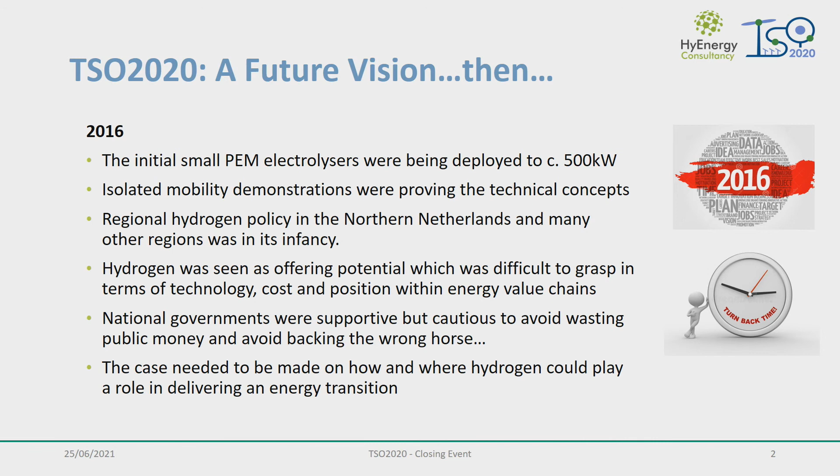Activity 5 is looking at the scaling up elements to mass application. We're going to be looking at what electrolyzers are doing, where can we place this hydrogen, where if we produce lots of hydrogen, where is it going to go, how are we going to use it, and look at how we can optimize the production and use of that hydrogen in the best way possible, and how that could fit within a future business model.

To start with, we wanted to consider what the drivers for demand would be. Energy engineers did study assessments of local regions around the northern Netherlands, in terms of how hydrogen could be both used and produced. This particular study focused on specific regions and how the hydrogen demand in those regions would differ.

In regions such as Friesland and Drenthe, hydrogen demand is going to be driven primarily by mobility, since the amount of industry based there is very small compared to other regions. Whereas if we looked at Groningen and North Rhine-Westphalia, we see completely different splits in terms of how the hydrogen will be used and the volumes used. In Groningen we're seeing significant chemical applications, and in Nordrhein we're seeing steel be the predominant application, just like in Lower Saxony. So these regional drivers towards hydrogen are all different, but all act as a sink for the hydrogen once it is produced.

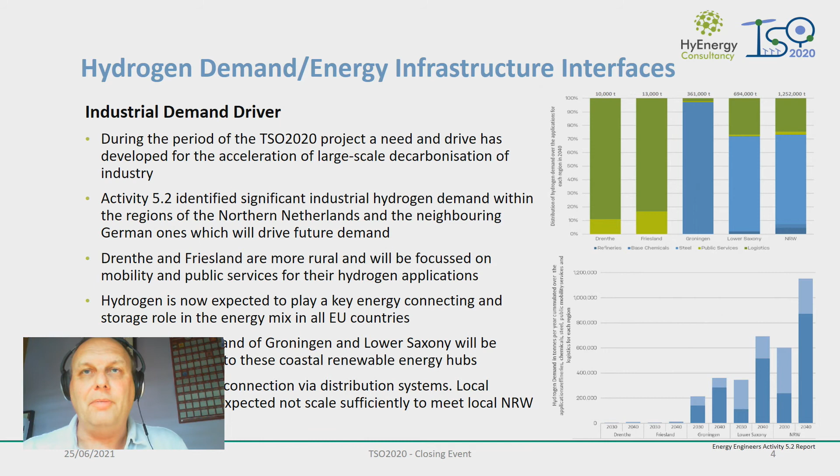Having done this project, we now know that if we produce significant quantities of hydrogen in a green way, we can use that hydrogen in local regions. The bottom graph on this slide shows evidence of industrial demand, particularly over the initial period up to 2030-2035, dominating the hydrogen requirements in these regions. So industrialized regions will have significantly more demand, while rural regions will see demand driven by mobility.

When looking at that mobility demand, we wanted to spread our net a little wider, to understand how mobility demand would fit within the context of the EU TEN-T corridors. A piece of work was done to look at the Rhine-Alpine corridor and its trajectory across the region, to understand where the hotspots for both demand and potential production could occur, and we identified five different locations worth further investigation.

We found that locations like Utrecht and Nijmegen would follow Friesland and Drenthe and be really mobility-driven regions. But we also found, quite interestingly, that places like Rotterdam, Duisburg, and Cologne would have sufficient hydrogen demand locally to generate their own local hydrogen infrastructure and their own potential hydrogen valley, just like Patrick talked about earlier. So some of these regions are capable of producing and using significant quantities of hydrogen themselves, some industrial driven and some mobility driven.

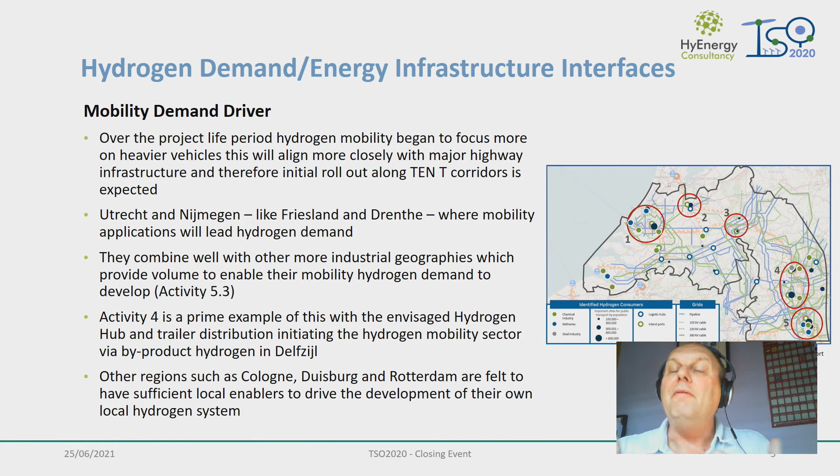Other regions will probably hang on to some of these bigger, more localized hydrogen valleys, becoming satellites of those valleys where they absorb some of the extra hydrogen. That's what we see in the regions in the north, where Friesland and Drenthe may absorb some hydrogen, while places like Groningen and Lower Saxony will be places where vast amounts of hydrogen are generated.

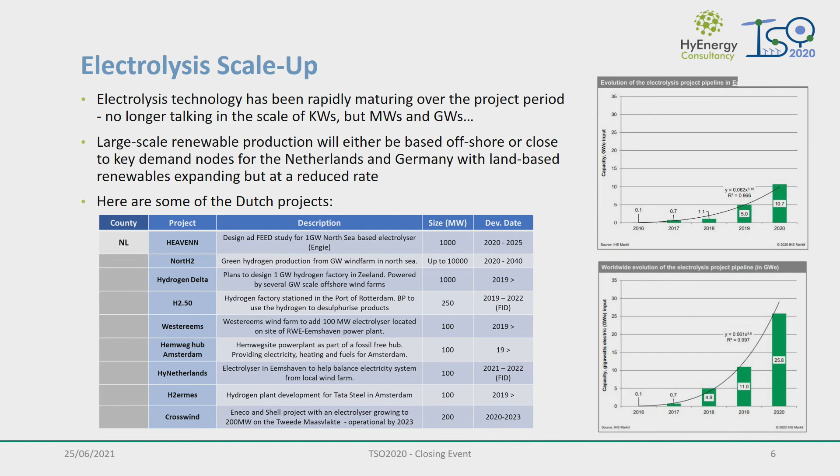Now, how is that hydrogen going to be produced? Over the period of this project, we've gone from electrolysis systems being conceived at around 500 kilowatts in terms of PEM electrolysis, to now seeing electrolyzers considered up to 10 gigawatts. Most of these electrolyzers are being positioned in coastal areas or offshore, and these production methods are seen as the connector, as Jose spoke about, between the electrical system and the gaseous system for energy supply in most countries.

The Netherlands has been very proactive in developing offshore large-scale electrolysis systems, and we can see a table of some of the opportunities beginning to exist there, together with timelines we expect them to come to fruition. But we also see this ramping up occurring right across the globe. Electrolysis systems are getting bigger, becoming envisaged as part of this wider sustainable energy network, connecting the electrical infrastructure with the gas infrastructure of the future. Mobility plays a role in that too, particularly where industry can't absorb some of those emission molecules.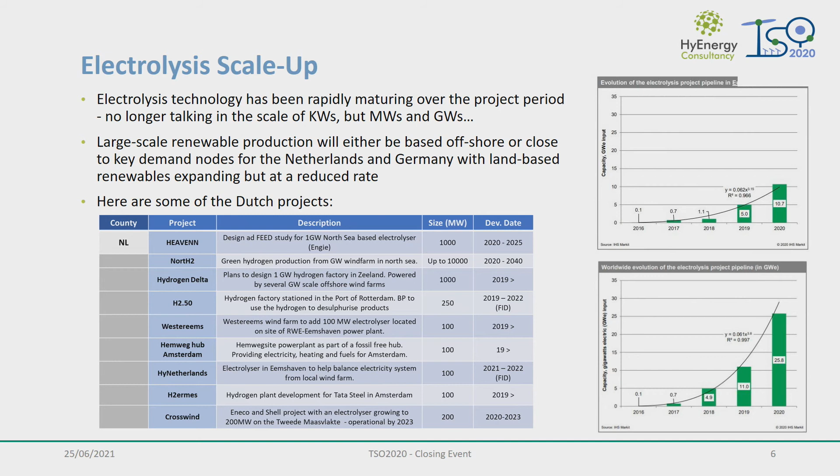What we also need in order to make all of this work, as Renee and others have touched on, is the ability to connect where you're producing your molecules with where you are actually using them. The pilot installations gave a small-scale representation of this. The Hystock project produces molecules, and trailers from both Delfzijl and Green Planet and Gasunie are able to move those molecules around the region to application areas. We see that as the initial methodology of moving hydrogen around until demand volumes get bigger, and the opportunity to use that demand to drive a change in the supply mechanism occurs.

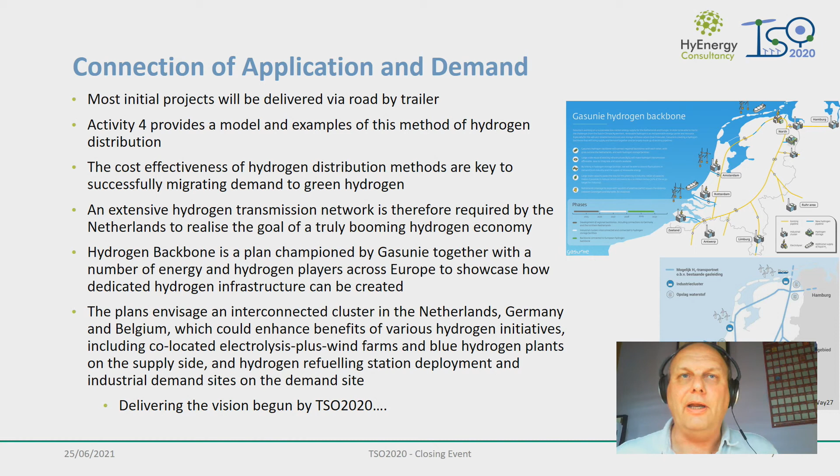Trailers are good up to a certain point, and I think it was Patrick who said that hydrogen doesn't travel well, but it doesn't travel well when you put it in a trailer. If you put it in a pipeline, you can send it across vast distances. Projects considered by gas TSOs across Europe, such as the Hydrogen Backbone project and the HyWay27 project mentioned earlier, show that using existing natural gas infrastructure interconnected with new supply points for hydrogen allows a pipeline infrastructure to be envisaged and expanded beyond the Netherlands, across Europe.

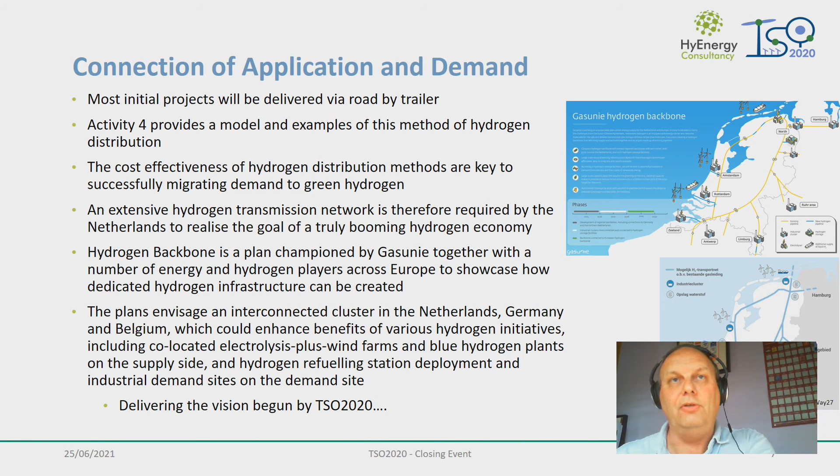So as that demand grows, as those applications grow in the hotspots we've mentioned, we have a methodology of connecting coastal electrolysis to those hotspots using pipelines. Initially we'll use trailers; eventually we'll use pipelines to get the molecules to the right place.

If we go to the next slide, in order to do that, we need a model. Part of this model was developed as part of Activity 3, which we heard about as part of the cost-benefit analysis that was done. But we also did work within Activity 4, which looked at the trailer model: how do we move those molecules cost-effectively using appropriate storage systems over the road, and can we make that as cost-effective as possible for our customers?

And then finally, as part of the Gasunie Backbone project, there is also a model that integrates the use of a pipeline to move those molecules. So you can see that we have all the elements of a complete system being produced by the partners of the TSO2020 project, and we are able to model the complete system to understand both the cost of supply, cost of production, but also the cost of supply to individual customers using various supply chains.

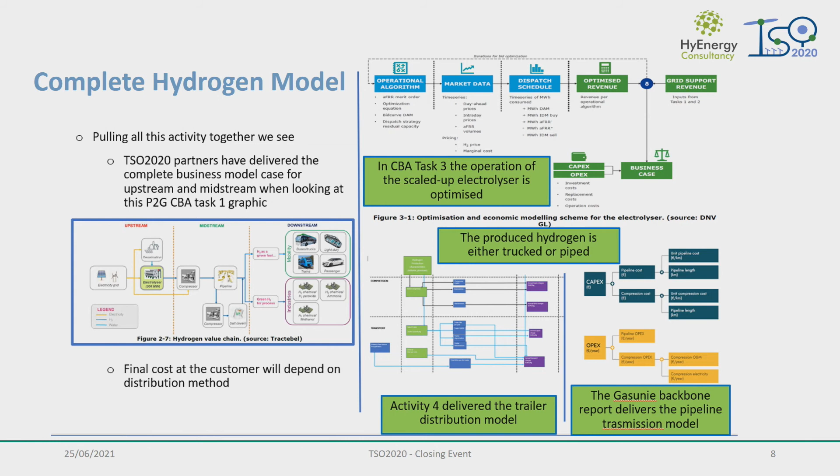So the future of this is that in 2021 we have a completely different view of hydrogen. We now see that the world has come towards hydrogen a little bit. We know that regional projects such as the HEAVENN project will act as a catalyst for regional development of many hydrogen activities. We know that mobility has migrated from passenger cars towards heavier vehicles, and electrolysis systems that we saw back in 2016 have grown by orders of magnitude up to gigawatt scale.

So now we have all the elements in terms of technology to consider a completely sustainable energy chain, and hydrogen will play a part of that energy chain. TSO2020 as a particular project has played its part in ensuring that hydrogen will enter that value chain, that sustainable energy chain going forward. And I think that's the last slide.

Sorry, Mark. Thank you. Thank you very much, Ian. That's a great overview and very useful to bring it back out to the bigger picture after we had a deep dive into the specific results of different elements of the project.

One question that comes to mind is because you very nicely described the way that demand, how the hydrogen will be used, also depends where you are and also where it comes from, and so on.